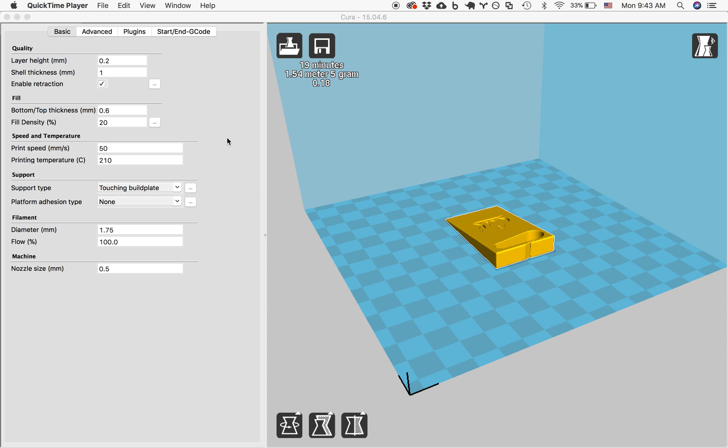As part of the 3D printing process, we go from a 3D CAD file, in this case ready for 3D printing, called an STL file. That's this little Cal wedgie here. Cura and these other slicing programs translate this STL file into a path for the machine to follow and print out your part, typically in G-code.

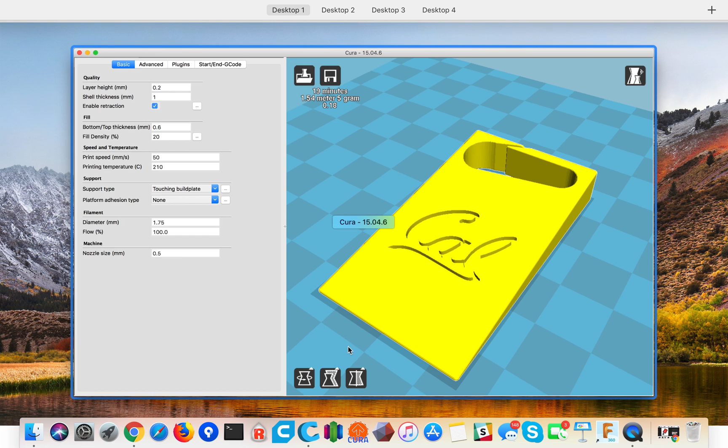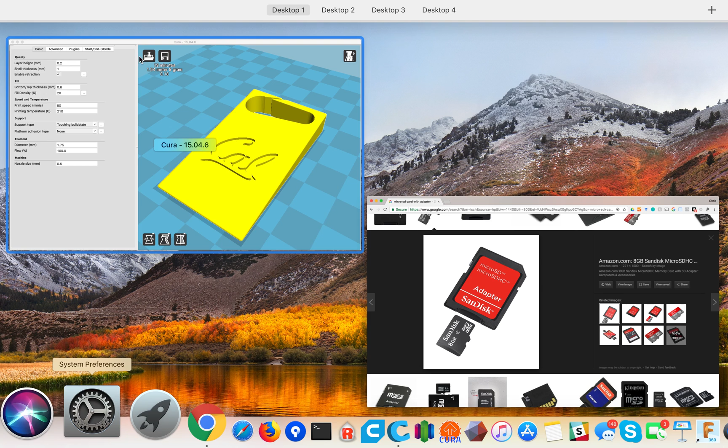But in this case, because we're going to be using a micro SD card with an adapter to run the 3D printer, you have to save the file on that disk in a certain way so the machine can actually read it. Without getting into too many details of why that happens, let me show you how it all works. First, let's say we're ready to print our Cal wedgie here.

What I'm doing, which you can't see on my computer, is pulling out a SanDisk SD card. I believe the SD card has to be 8GB or less, otherwise these little Printrbot machines can't handle it.

I'm putting that into my SD card slot, and you'll see this little disk icon change into, if everything goes well, an SD card icon. Also on your desktop, on a Mac at least, you should see it. Because I'm doing this live on a video, it's not going to work, so I'm going to try a different one. Make sure you have a good card - I think we filtered all the bad SD cards out of your access at the Haas Innovation Lab.

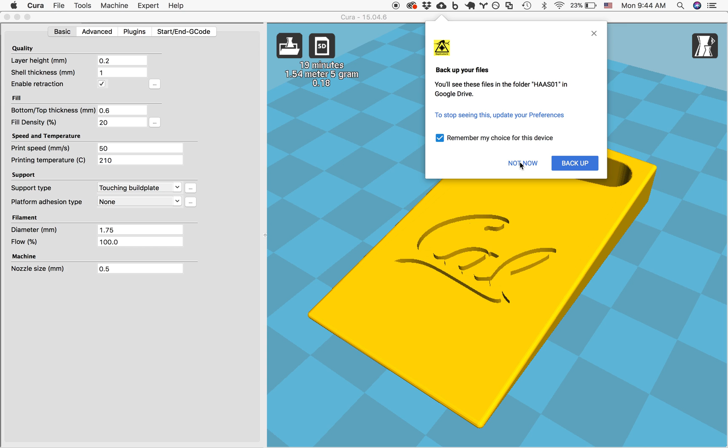So I've just put in another one. You can see that now it's actually recognizing the drive - you don't need it to back up anything. Now you can see it says 'Save Toolpath to SD card.' That's a good sign - that means the computer's reading the card.

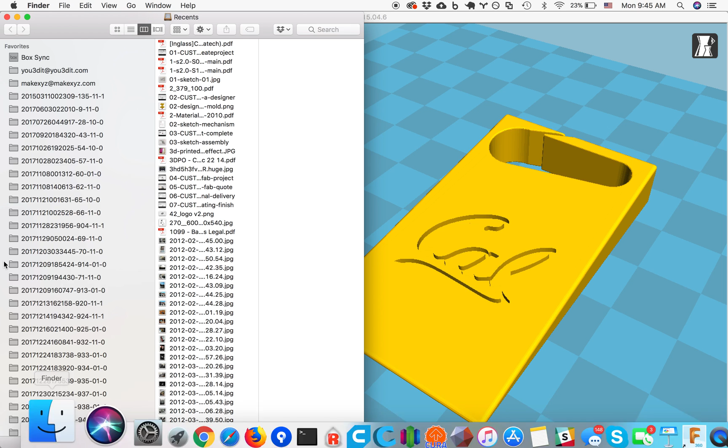So if I come in here and save it, you'll see it says Haas01, Cal wedgie. It's saved to the SD card, but we're not done yet - we can't pull it out. We have to rename the file to a particular file name so that it will read in the Printrbot.

So you can see here, I have two files now. I have auto0.g, which is the exact name we have to name this new G-code file, and then the G-code file I just created - you can see it was created at 9:44 today, just under a minute ago.

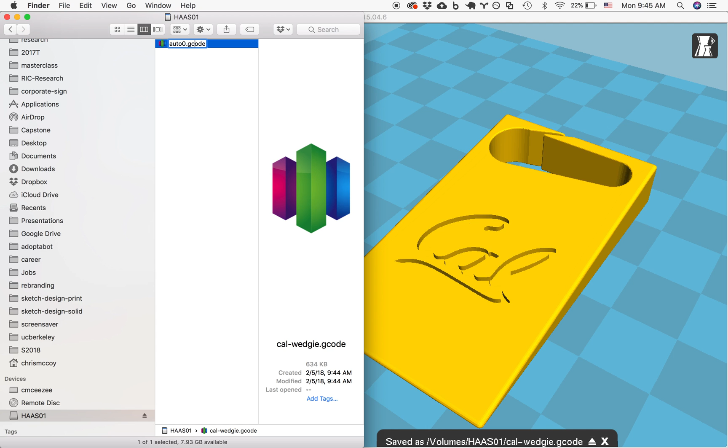So what we have to do is delete this file - move to trash - and then we hit enter to rename the file, and we change it to auto0.g, getting rid of the other code. It's going to ask us, are you sure you want to change the extension? Yes, use .g. Now this is for a Mac ecosystem.

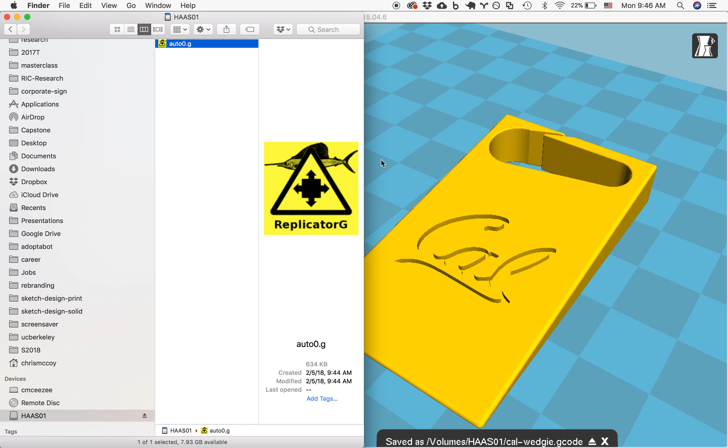On a Windows ecosystem, you can run into other issues where you rename it and you have a different extension, but actually the extension doesn't change. So those of you who are PC users will have to right-click the file and allow extension changes. Either way, it should be auto0.g, and now you can eject the disk - it's ready for insertion into the 3D printer. Once you unplug and plug in the 3D printer, you'll start to feel the nozzle tip get warm, and it should start printing your print.

All right, hopefully that helps you understand the auto0.g renaming process. Thanks.